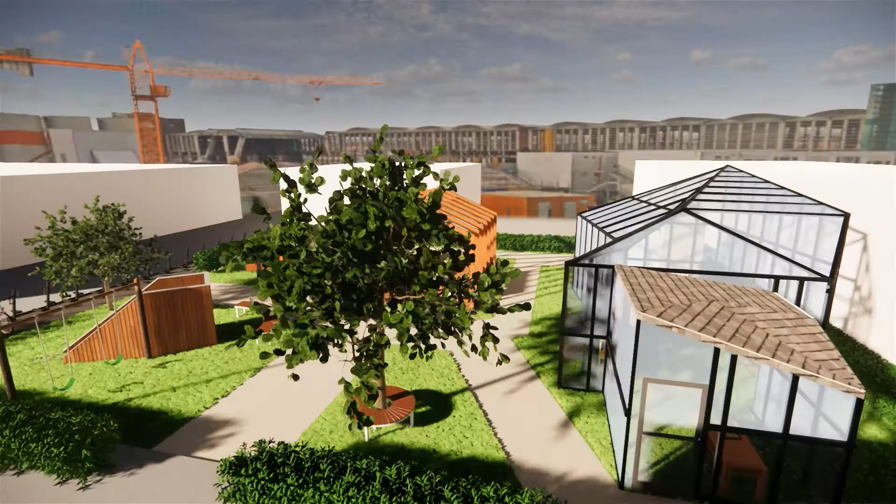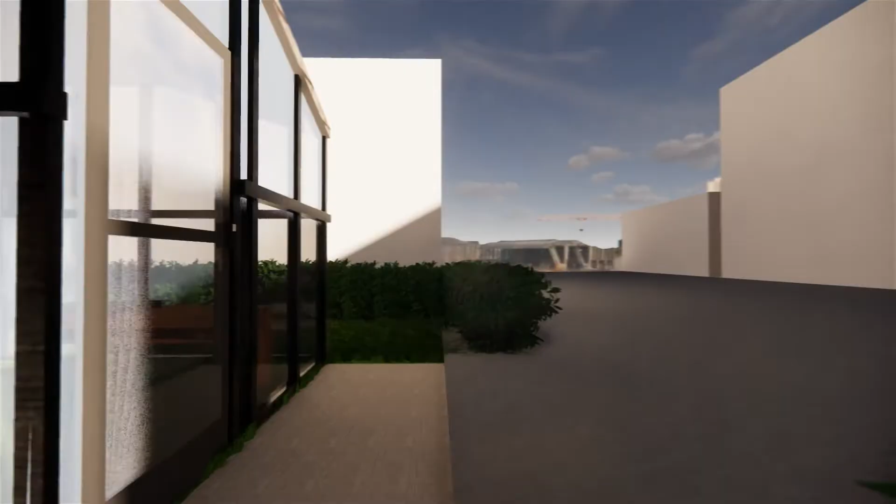Site analysis. Talisay City, Negros Occidental is located between Bacolod City and Silay City.

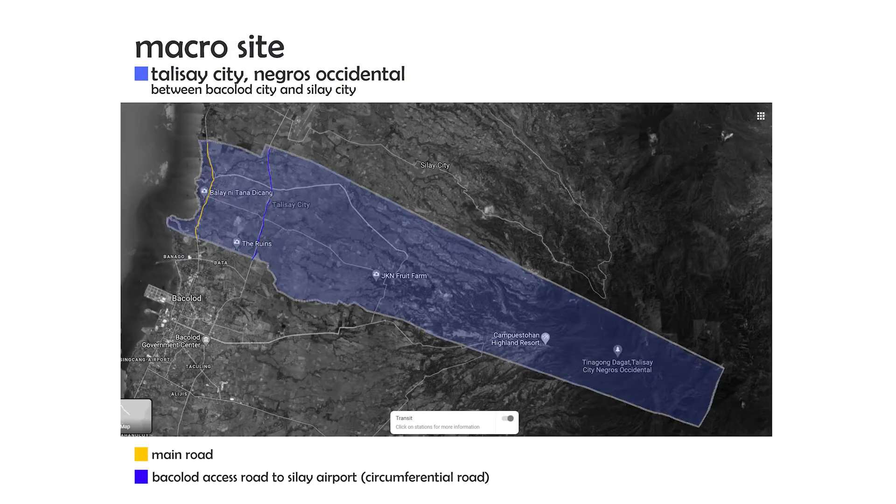From the meso site analysis, I have analyzed the different areas of the community, which are the residential, commercial, the school, the churches, and the main road.

I was given the freedom to choose 3 possible sites for the proposed program, and I chose site number 2, because I think that it is convenient to everyone. It is near residential areas as well as the commercial ones. It is located at the center, and I think that everyone will be able to have access to it.

Physical parameters. The site is occupied by an abandoned junkyard, so I decided to revive it by changing it into something else.

Observations. From my gathered data from my observation, near the location that I have chosen, there are children playing along the streets. People often stand by along the street to wait and interact with other people, and neighbors would usually walk around the street to get fresh air.

Parameter: Location. Its coordinates are 10.736631 and 122.967887. It is located in front of a commercial area and is surrounded by housing.

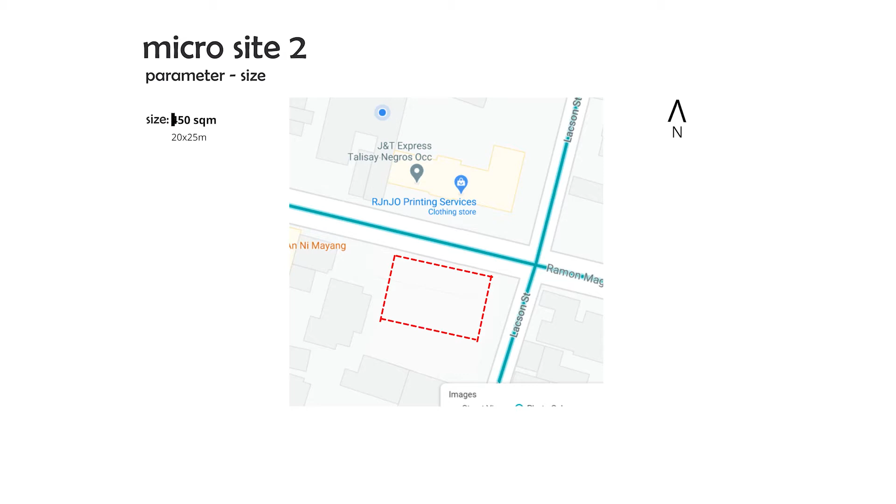Parameter: Neighborhood. Its nearby landmarks are the following: commercial area that includes a cafe, laundry shop, J&T Express, mini clothing shop, and a repair parts shop, and store or sari-sari stores.

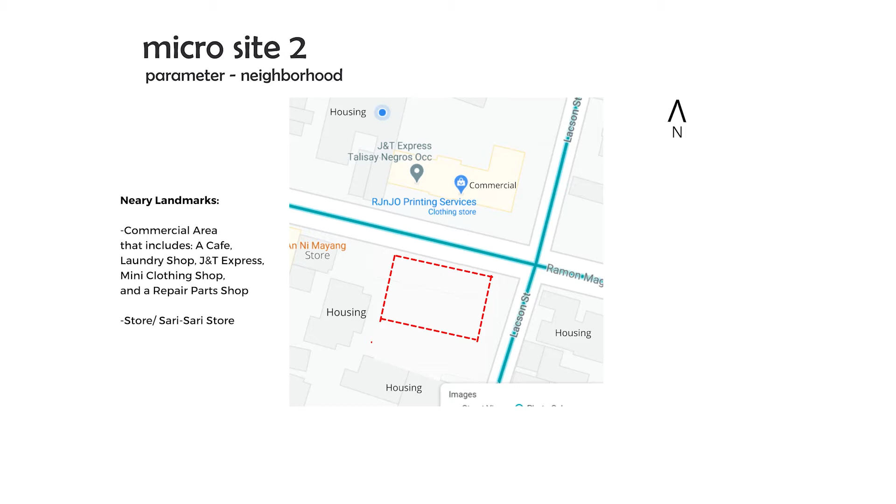Parameter: Infrastructure, flow of traffic. Vehicles have access from both sides, east to west, and south and north.

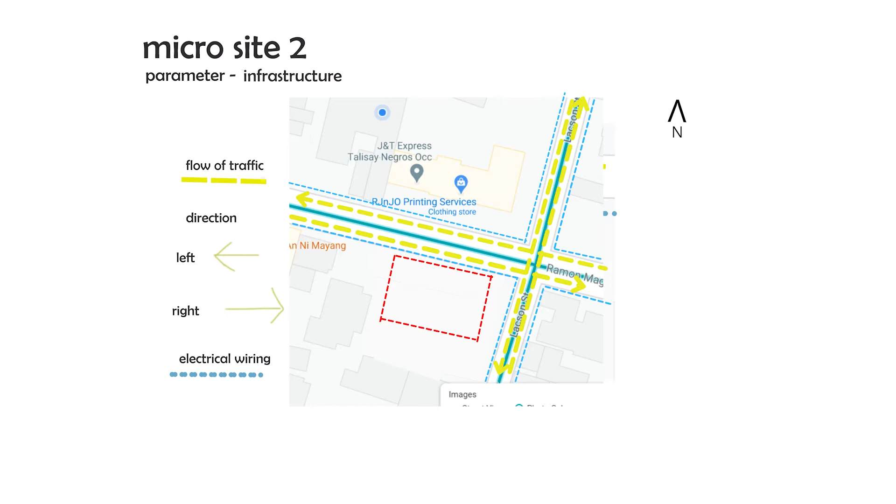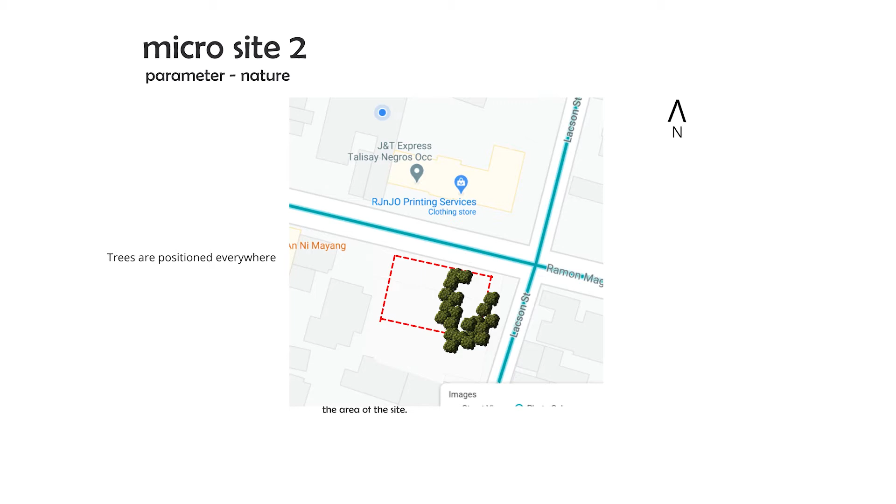Parameter: Nature. Trees are positioned everywhere within the location. Parameter: Man-made. Its electrical pole is located near the lot and the following lots.

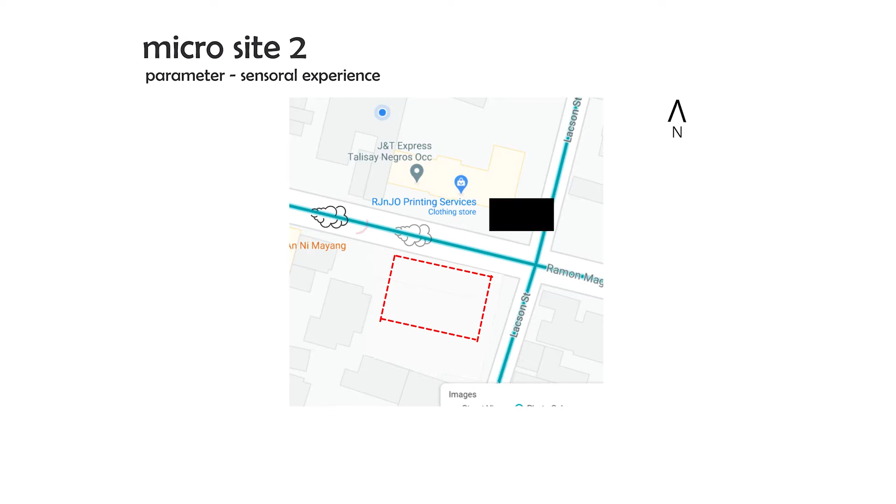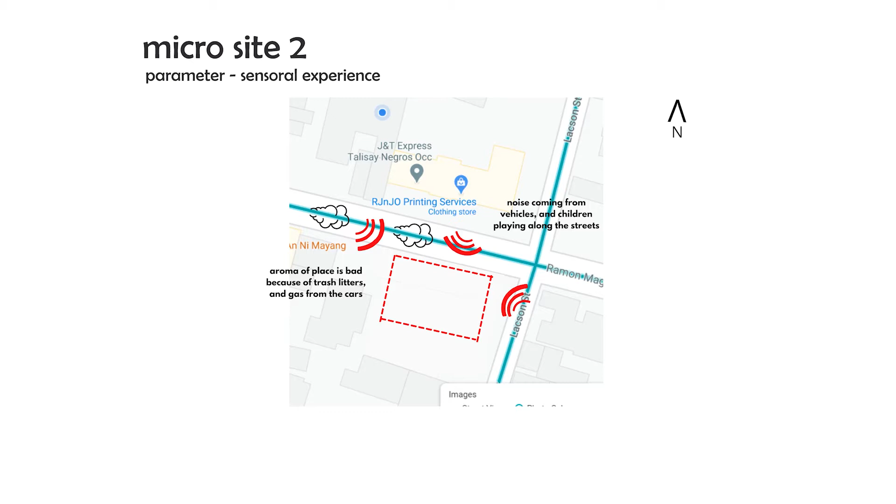Parameter: Sensorial experience. The aroma of the place is bad because of trash litters and gas from the cars. There are noise coming from vehicles and children playing along the streets.

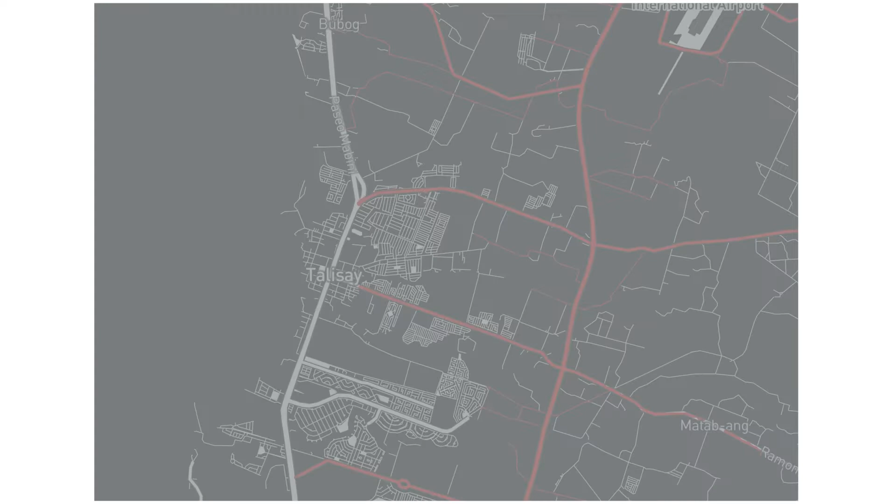Socio-cultural parameters. History. Talisay was originally inhabited by natives who led nomadic lives at the foot of scenic north Negros mountain ranges. They are famously known as the Negritos.

In 1788, families of Malay descent settled in the pristine part of Negros Island and named it Minuluan. Unknown to many, the sugar industry in the province has its very roots in Talisay. The seedlings brought from Spain thrived well in the rich, loamy soil.

Fray Cuenca improved sugar production of the crude wooden mills with the invention of Molino de Agua, and the rest, they say, is history. The Spanish colonizers became guardians of our economic, socio-political, and spiritual lives, and with more of the Minuluan population embracing the Catholic faith, the city was decreed a town on September 20, 1850, with San Nicolas de Tolentino as its patron saint.

The city of Talisay in Negros Occidental was named after a tree called the Talisay tree, also known as Terminalia catappa, after the tree grew along the mouth of the Matabang River. Its abundance gave the city its life and its identity.

The population of Barangay Zone 12 consists of 2.59% of the overall population of Talisay City, Negros Occidental, which is 102,214.

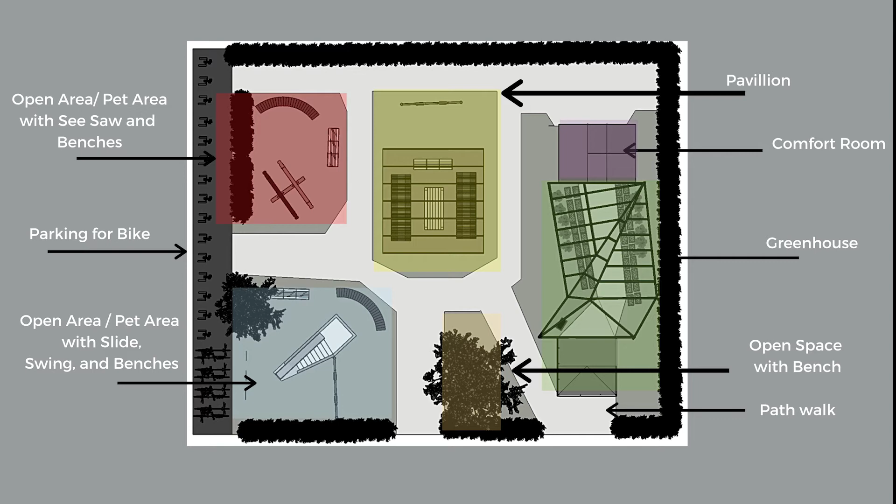This is the floor plan of the site. It is 25 by 20 meters, the greenhouse is 11 meters by 5 meters, the comfort room is 3 meters by 4 meters, and the pavilion is 5.45 meters by 5.24 meters.

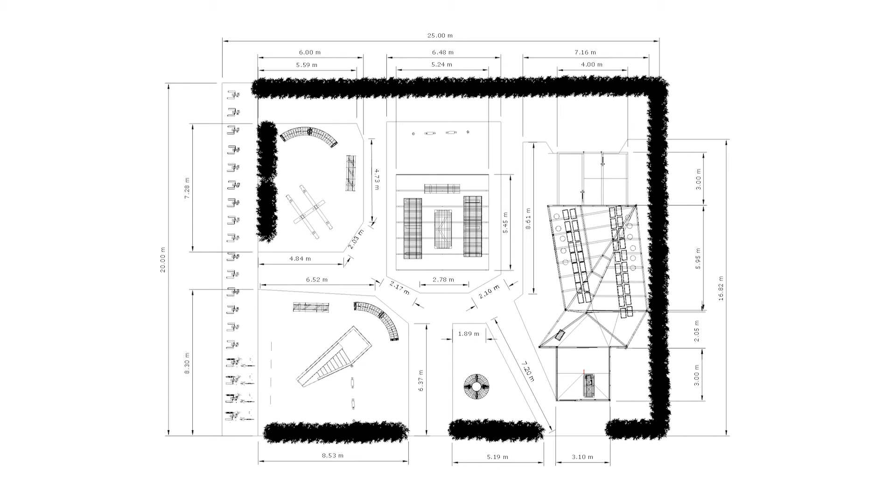Design response. For location, the park will be built near residential and commercial areas for easier access. For the neighborhood, I would add barriers to separate the park from the residential areas surrounding it.

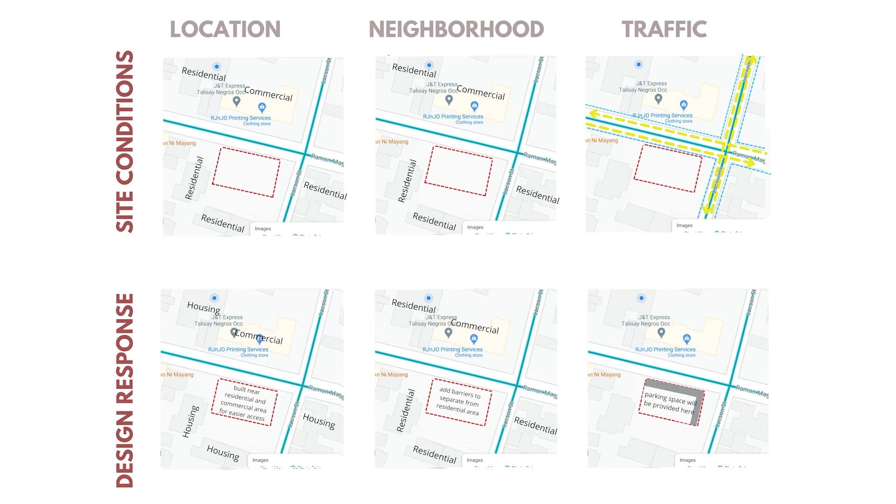For traffic, I would put a small parking space for bikes so that people near the neighborhood can park their bikes. Next is my design response for nature.

I would position the biggest tree in front, which is a historical tree in Talisay and one of the oldest trees. Some of the trees will be moved to another area or land located elsewhere. For sustainability, we would also use some of the trees as materials for building the benches, pavilion, and playground.

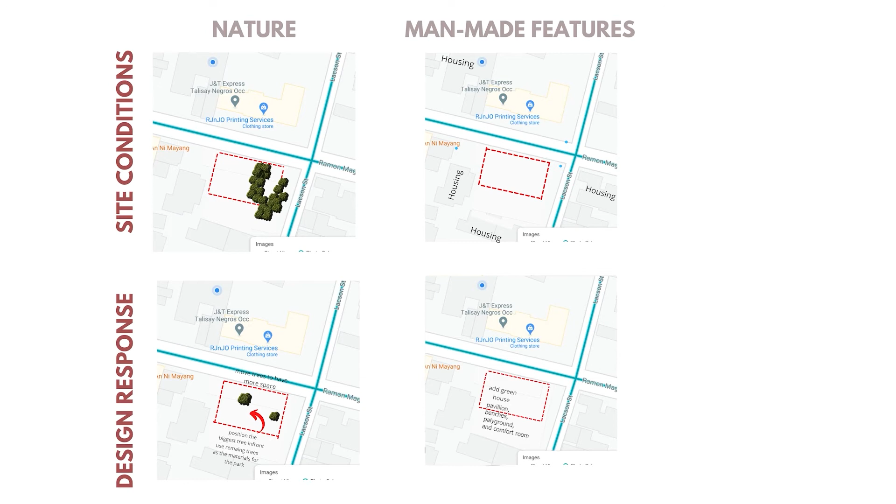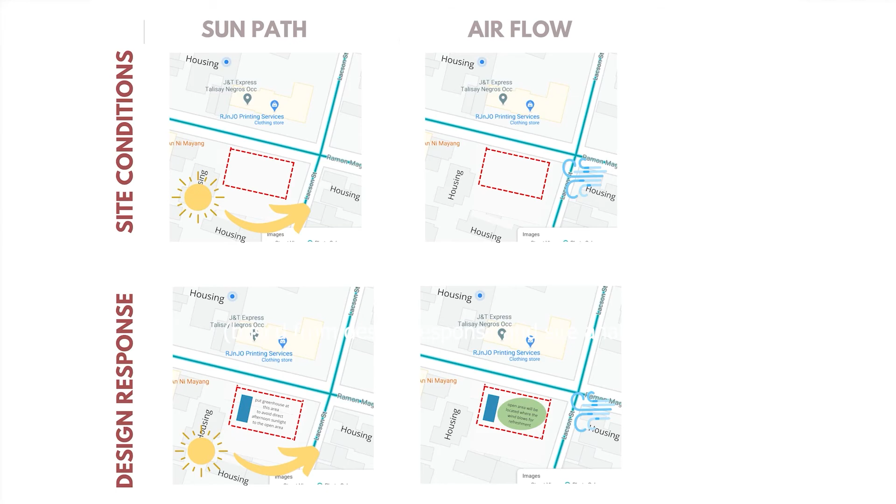Volumetric analysis. The lot is 25 by 20 meters. I would add a parking on the side, and add trees to manipulate the wind, considering the historical Talisay tree.

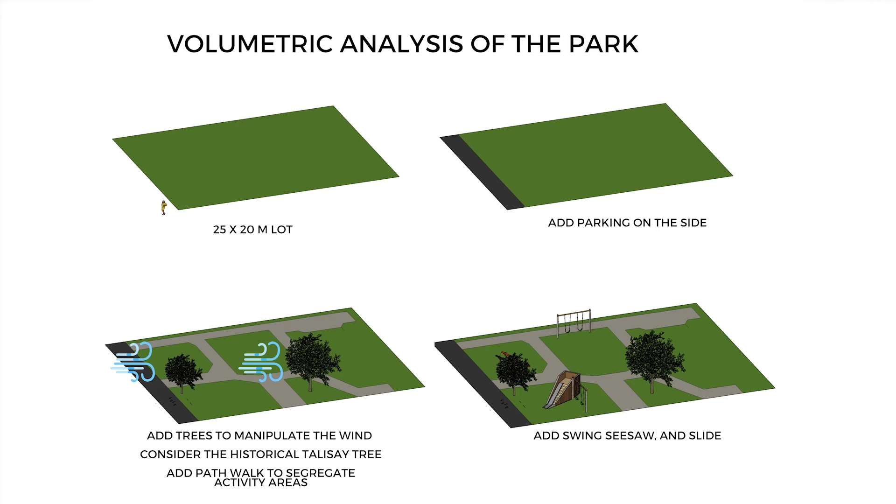Add a pathwalk to segregate activity areas. I would add the swing, seesaw, and slide, then add benches for the sitting area.

I would add a platform to separate the pavilion from the land, add benches and a table on the pavilion for more sitting, and add wooden slats that mimic a standard greenhouse to give border to the pavilion.

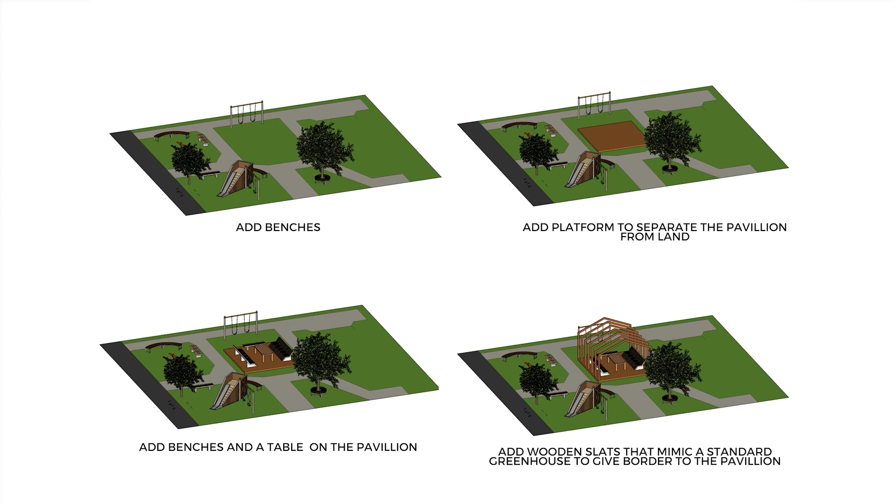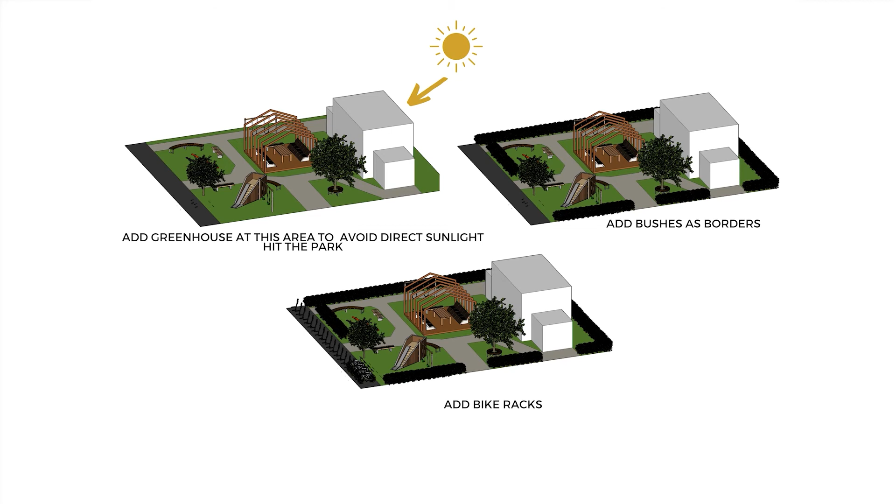I would add the greenhouse in this area to avoid direct sunlight hitting the park, add bushes as borders, and then add bike racks.

Volumetric analysis of the greenhouse. I started with boxes or cubes, then angled this area for direct sunlight to enter the glass. The angled area would face the morning sun, which is at the east side.

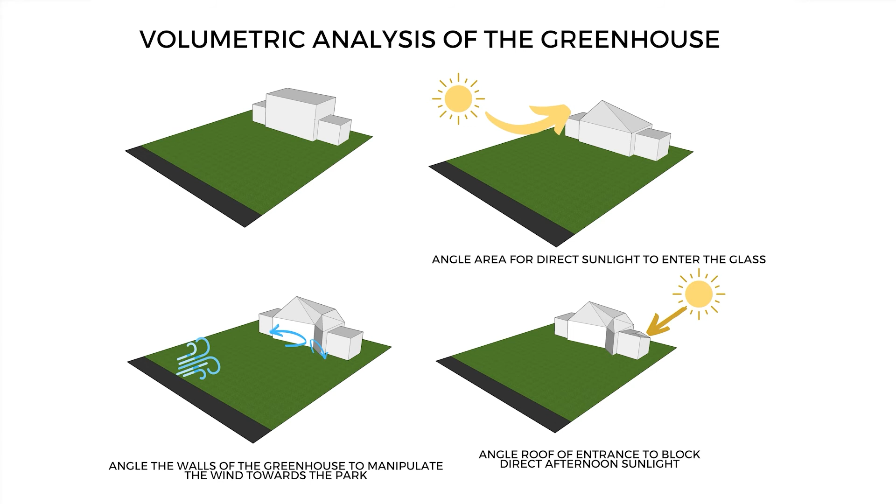I would angle the walls of the greenhouse to manipulate the wind towards the park, then angle the roof of the entrance to block direct afternoon sunlight, and angle the roof of the comfort room to avoid direct afternoon sunlight and mimic the greenhouse formation.